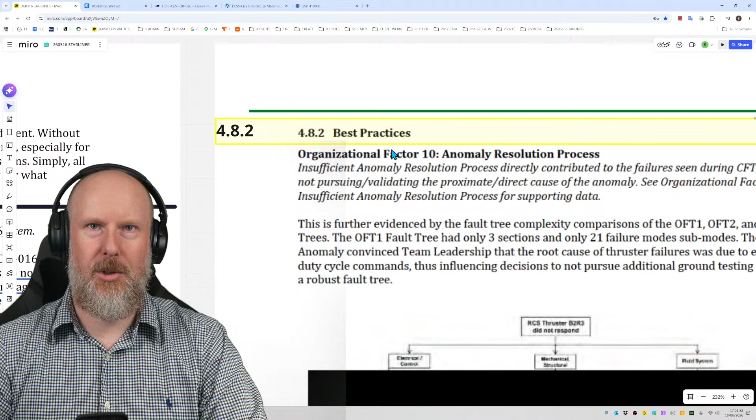Right, so best practices then. Organizational factor number 10. Actually, let me just put some bars in there so it's easy to see what's what. So organizational factor 10, organizational factor 11, observation 1, 2, 3.

Maybe we'll get to certification today. We should do—I mean, there's so much to go through. It's a huge report, 311 pages, and we're at almost page 100, I think. So we've done well to get this far.

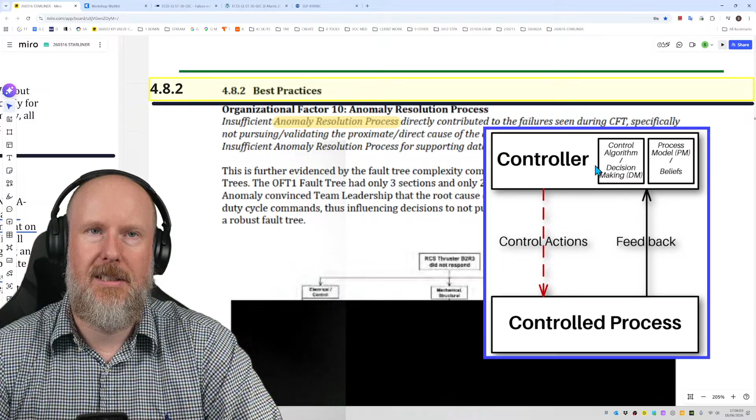And then, if this control process is the people or organization that needs to follow this process, then who or what is responsible for making sure that process is put into that context, and for making sure the controllers in this control process that need to follow this anomaly resolution process have their control algorithm and process model updated, correct, and maintained that way throughout the life cycle? So again, I'm just trying to drill into your brain this control loop. So—an insufficient anomaly resolution process.

Hang on a second. What is going on with this? There we go.

Insufficient anomaly resolution process directly contributed to the failures seen during the crewed flight test, specifically not pursuing validating the proximate direct cause of the anomaly.

So is that the process's fault, or is it the organization, the control structure that is charged with actually fulfilling that process? Because that's two different questions. If the process is nonsense, then we can't be surprised if the execution of that process is going to have issues.

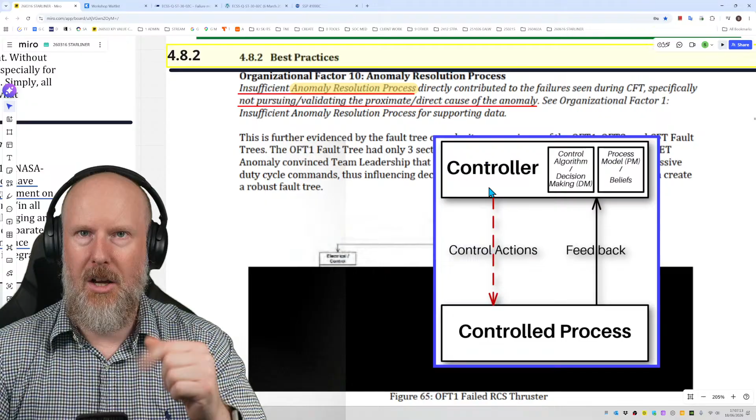So is it the process itself that's incorrect? Is it the creation of that process that's incorrect? Or is it the way that process is implemented in an organization? There's a number of different questions there, and we have to be specific which one of those we're actually referring to. Or is it all of them? Because it could very well be all of them.

See organizational factor 1, insufficient anomaly resolution process for supporting data. And there's something I've forgotten to open up. Just bear with me a second. Because I need the investigation report available, don't I, in case I need to refer to it. So let me just get that open.

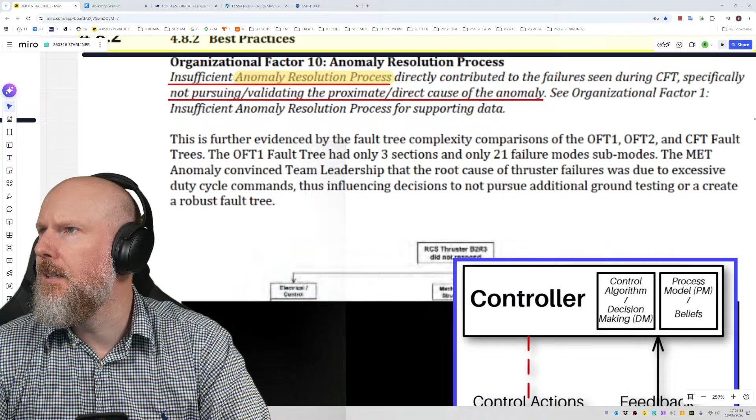There we go. Right, so what page is factor 1? Contributing factor 1, organizational factor, with a Z. Organizational factor 1. Not 15. Oh, apparently there's only 13. Oh, maybe it's 0, 1. No, it's not. Okay, factor. Oh, where is it? Why isn't it? Doesn't the word search function work anymore? Come on, what's wrong with you? Okay, well, that's a bit annoying.

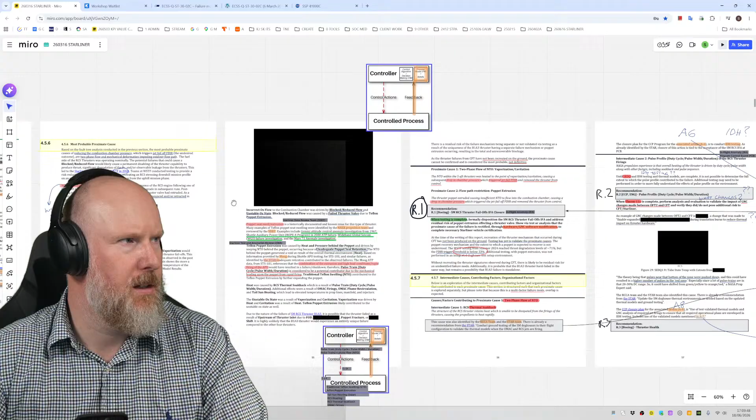So organizational factor 1, where is organizational factor 1 then? Observation 1, recommendation 1, organizational factor 7. Recommendation. Where's the organizational factor number 4? So it's before there. It's not under there. Organizational factor 1. Where is it? Is it really that far back? Evidently so. If only the word search function worked. I'm trying to find the organizational factor number 1. For some reason the word search does not work. Ah, there it is. There it is. Found it, look at that.

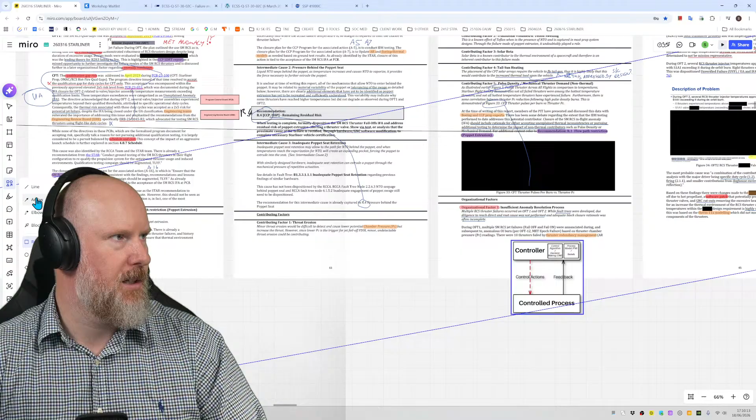Organizational factor 1, insufficient anomaly resolution process. Right, so let's just take that and then we can move it to wherever it is over here. Where is it? Over here somewhere. There we go, that one there. So: insufficient anomaly resolution process directly contributed to the failures seen during CFT.

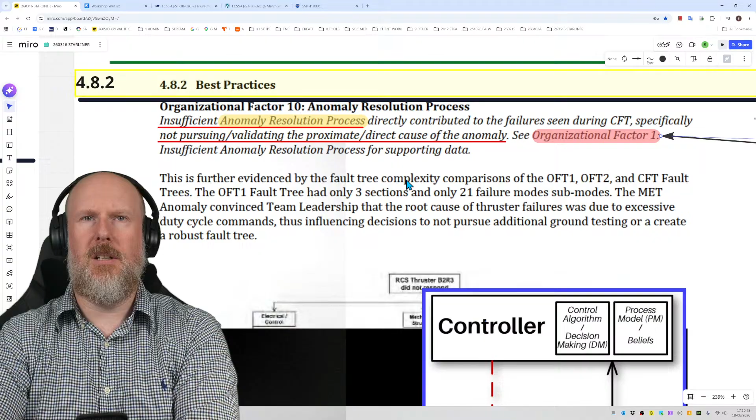Specifically not pursuing validating the proximate direct cause of the anomaly. This is further evidenced by the fault tree complexity. So fault tree analysis, comparisons of OFT1, OFT2, and CFT — crewed flight test, orbital flight test fault trees. So there's 3 sets of fault trees mentioned there. The OFT1 fault tree had only 3 sections and only 21 failure modes, submodes.

The mission elapsed time anomaly convinced team leadership that the root cause of the thruster failures was due to excessive duty cycle commands, and thus influencing decisions to not pursue the additional ground testing or create a robust fault tree.

So if we were talking about the mental model and the beliefs of the team leadership, whoever they are, because it's not really clear what team, what leadership. Are we talking about safety engineering leadership or flight test operations leadership, or who are we talking about when we say leadership? This is one of the benefits of using CAST as part of an investigation, because when you build the control structure model, it forces you to make explicit who you're talking about. So just saying team leadership — well, who are we talking about? Which bit of this control structure is team leadership?

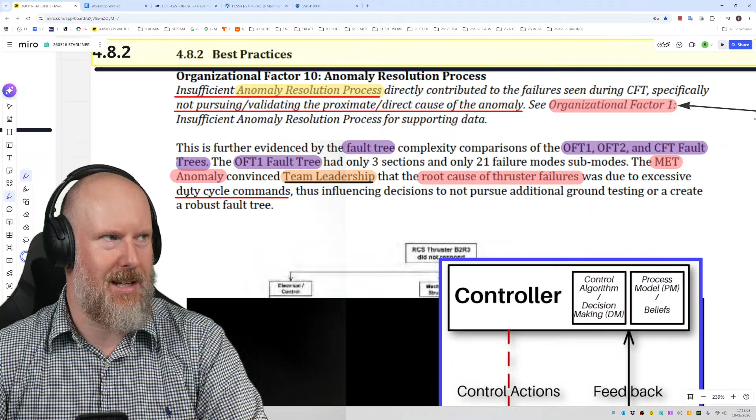If it is a load of different leadership entities doing various things, you can refer to them with a generic term, but you should still at least attempt to be more prescriptive. The mission elapsed time anomaly convinced team leadership that the root cause of the thruster failures was due to excessive duty cycle commands — so that's control actions — thus influencing decisions to not pursue additional ground testing or create a robust fault tree. Well,

I'm not quite sure I understand or agree with how that has been concluded, because surely if they were having issues with the spacecraft, they should have done ground testing and the fault trees anyway. The thing should never have taken off without a robust fault tree. And you could say, well, hang on a minute Simon, you've just been banging on for days and days and hours about how fault trees are a load of nonsense. And my view is that they're not complete nonsense.

They can be helpful for certain specific tasks. But if we rely solely on the fault trees and how good they are, we're, of course, going to miss stuff. And we clearly have missed stuff in this situation. So fault tree on its own is not enough. And it's certainly not enough when they're not done to a good standard.

But again, the reason they're not done to a good standard is something the investigation should go and look at. Why would it make sense for them not to be a good standard, to not cover all of those things? What is the control structure around the creation of those fault trees and the review of those fault trees and the acceptance of those fault trees and making sure that they're changed and updated or reviewed after an incident or near miss? Anyway, let's keep going. I've moaned enough about that.

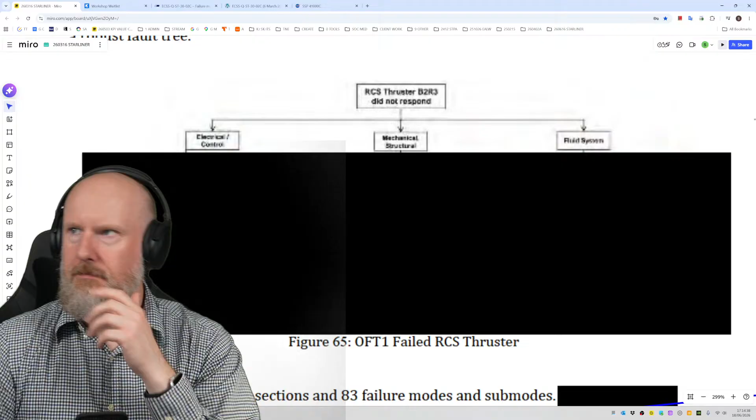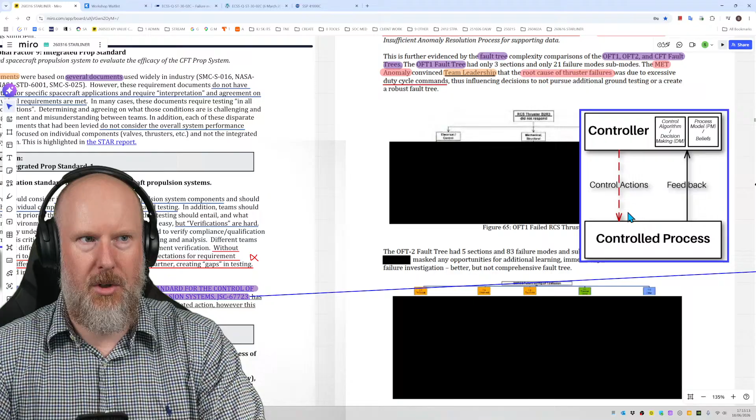So the RCS thruster B2R3 did not respond. So this top event in this fault tree is very specific about one particular thruster. Electrical control, mechanical structure, or fluid system. So very simplistically, electrical control is where you'd anticipate the control actions to be considered. Mechanical structure and fluid system would be considered as inputs and outputs or contributors to the control path or feedback path, or even the controller's ability to control itself.

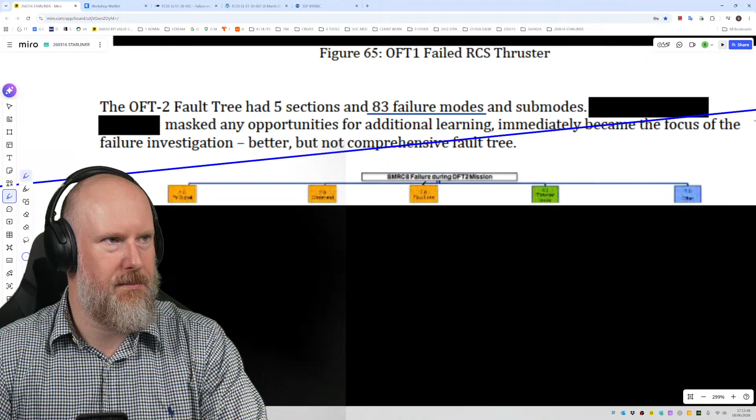So OFT1 failed RCS thruster. OFT2 fault tree had 5 sections and 83 failure modes and submodes, masked any opportunities for additional learning, immediately became the focus of the failure investigation. Better but not comprehensive fault tree. So again, I can't really read what those say. That seems to read other, command, I think. Mechanical, I think. This bit, I don't know. I can't really read that.

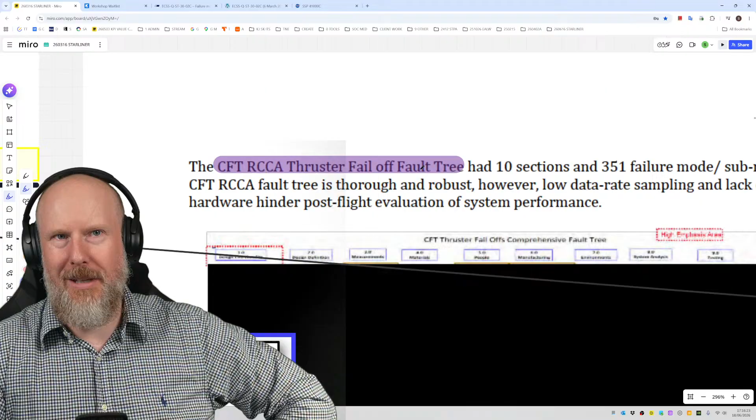The CFT RCCA thruster fail off fault tree. So again, I'm highlighting this with purple because in my convention of highlighting things with lots of colours, purple represents a document of some description. So this fault tree analysis will be in some kind of report, I'd like to think, that's been reviewed and signed off and is config controlled. And maybe it's got a fault tree software file that goes with it. Maybe some spreadsheets. Okay, so the fault tree had 10 sections, 351 failure modes. My gosh, that sounds like a painful fault tree to create and review.

The CFT RCCA fault tree is thorough and robust. You can have the most thorough and robust fault tree in the world. It's still not going to capture stuff that STPA captures. That's a fact. However, low data rate sampling and lack of recovered hardware hinder post-flight evaluation of system performance. Okay, so we've got materials, I think, mechanical, maybe. Manufacturing. High emphasis areas. Testing, something else. Okay.

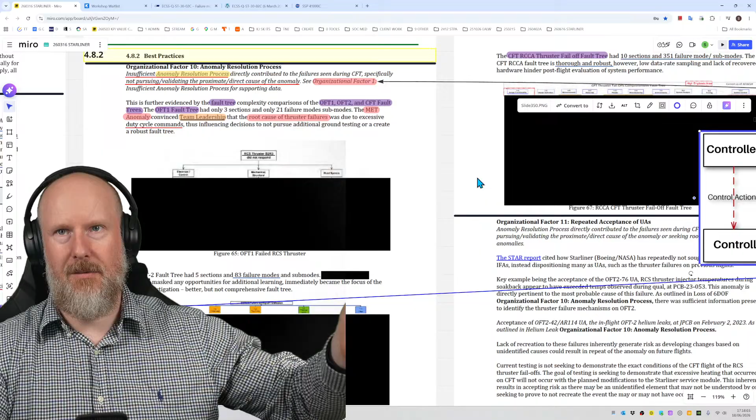Great. So this section is all about the anomaly resolution process, but all they've done is talked about the quality of the fault trees. So what is it about the process? What is the process? Is there a reference number for it? Is it that they were using an old process, or an obsolete process they shouldn't have been using? Why is it not discussed in this section? I want to know, or the audience wants to know. Is this discussed elsewhere? I don't know. But this bit is not adequate. There's not enough there.

And I'm hoping, just thinking about things through the lens of the feedback loop, you're starting to think, well, yeah, Simon, I kind of see what you're talking about. These things need to be addressed. In fact, shall I just make it really explicit while I'm at it?

Let me just... No, I didn't want to do that. All I wanted was... Oh dear, what have you done, Simon? You made a mess. All I wanted was the grey text. Oh, I'll just use that. There we go, that's quicker. Right, sorry, let me just do this again.

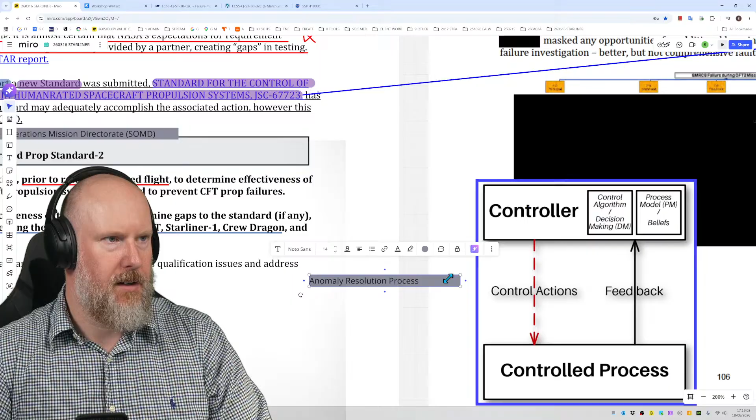So if you imagine that anomaly resolution process, for the purposes of the investigation, this is the anomaly resolution process at the top, and it is implied that a control action from that process goes to the controlled process, which is the project, the program in this context. Project or program.

And I've spelled program wrong. There we go. Got an extra R in there.

There we go. Right. So if you think about it simplistically like that, we've got this piece of paper with some stuff inside it. And that stuff is intended to influence the program or the project and the people that do the work. So we can start thinking about it like this. Well, how does that anomaly resolution process find its way to the people in the program? What decisions does it contain? Does it contain criteria? Does it contain requirements for information? Does it have references that inform its process?

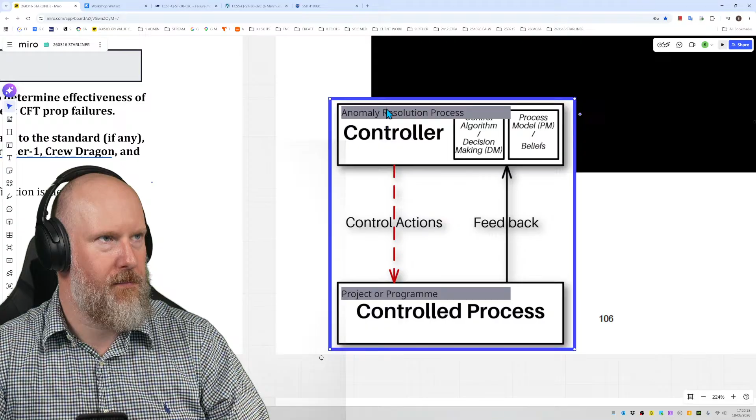And then we can think about, well, oh dear, what have I just done? And then we can think about it from the perspective of, well, what if this is the process here at the bottom? Who is the organizational sponsor, responsible stakeholder? So they're responsible for the process. So what is it they do about making sure this process is up to scratch and actually works? What feedback do they get about the process or from elsewhere to make sure that this process is working?

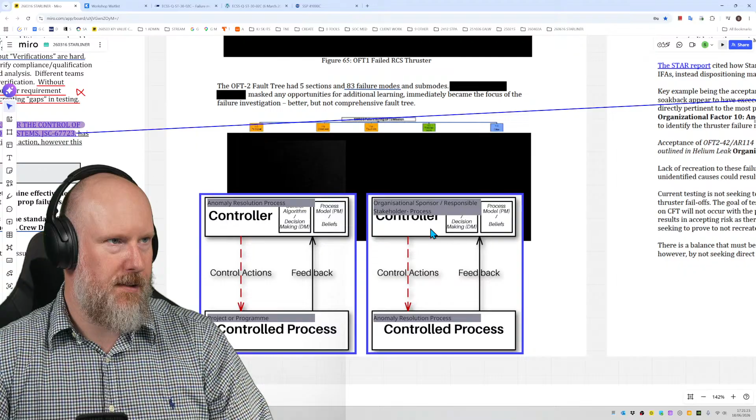And then the next part is, I think I've talked about that to death. So I suppose you could say that this controller is like that. So the organizational sponsor, responsible stakeholder for the process itself, and then the process and how it affects the program. And then ultimately you have the actual content, control actions originating from fulfillment of the process. So whoever does the actual investigation and the work. So you can see there's a bit of a mini control structure there for the context of the process. I hope that makes sense.

So let's just move that up a little bit. Group. No. Yeah. There we go. Bring that to the front. There we are. Right. Let's leave that there like that, shall we? Let's steal that one. Okay.

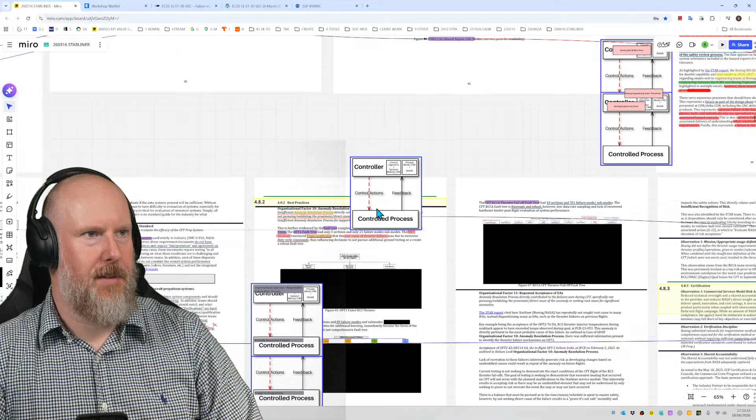So let's go on to organizational factor number 11. So repeated acceptance of unexplained anomalies. That's what it is, isn't it? UA. Unexplained anomaly. Yes, that's what that means. So unexplained anomaly. So let's have a think about this then.

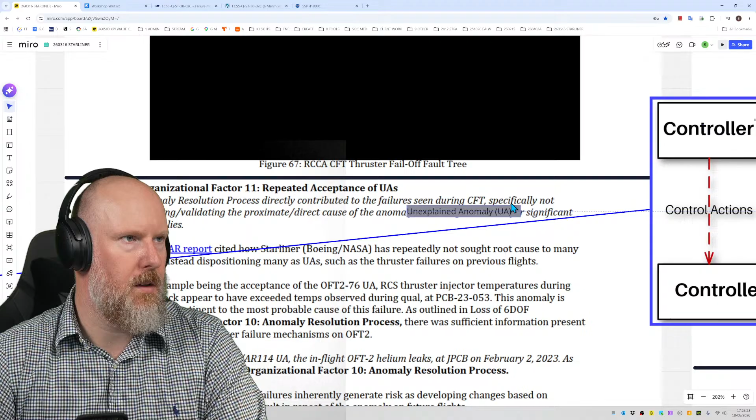So this is the program itself and this is the leadership of the program. If they're getting feedback which are essentially unexplained anomalies, that should be a bit of a warning flag as to something's not right here. Either we're not doing a process properly or detailed enough, or there's something genuinely going weird. So what beliefs did that leadership have? What decisions were they making? And what control actions did they provide based on these repeated acceptance of unexplained anomalies? Why would it make sense to keep accepting those things?

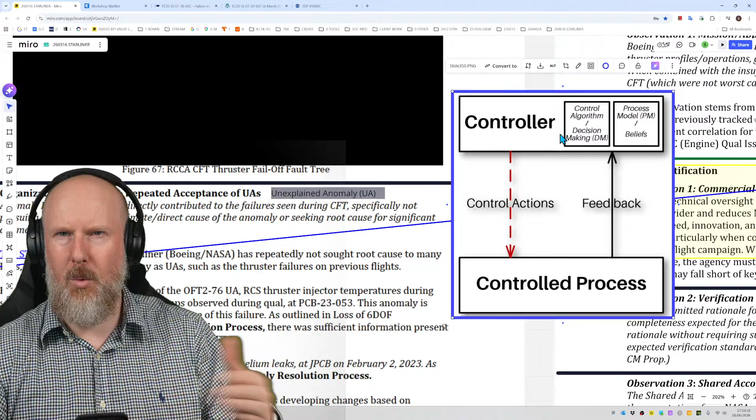You know, who or what is involved in this as an independent assurance loop that should be saying, well, hang on a minute, leadership, you're accepting these unexplained anomalies. Why aren't you doing anything about it? Where's that independent assurance loop? How are they implicated in this?

So the anomaly resolution process directly contributed to the failures. I'm not sure I agree saying that it directly contributed. Maybe there's a rhetorical discussion there about, well, when we say directly contributed, what do we actually mean? Because like I said before, when you're talking about direct contributions, you're really talking about the physical process where harm occurs, and then those controllers that are directly in physical contact with that process. Whereas an administrative process is really quite far removed from that front line. So how can you really say that it's directly contributing? Maybe that's rhetorical, but anyway, let's keep moving.

So the STAR report cited how Starliner, Boeing and NASA has repeatedly not sought root cause to many IFAs. I think that's in-flight anomaly, isn't it? IFA. In-flight anomaly, everybody. See, I'm getting really good at remembering. I'll forget in a minute. So Boeing Starliner has repeatedly not sought root cause to many in-flight anomalies, instead dispositioning many as unexplained anomalies, such as the thruster failures on previous flights.

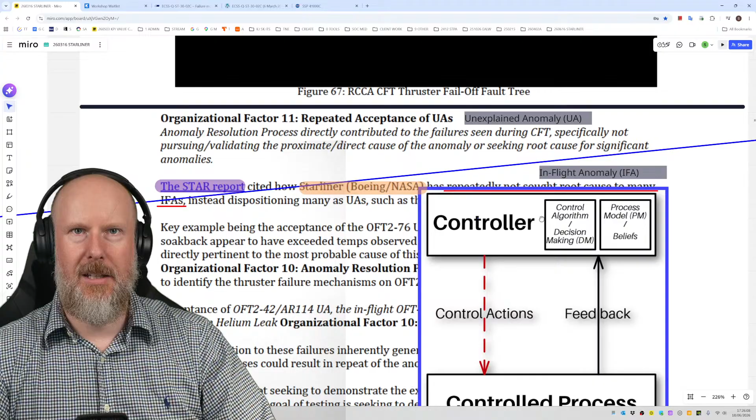Right, so let's just explore that for a minute. So if this controller is Starliner, Boeing, NASA as an organization, and they repeatedly not sought root cause to many IFAs, and they've instead dispositioned many as UAs, down here, control actions, why would it make sense for them to do that? Is it because there's loads and loads of them and they're overwhelmed and there's not enough people or resources to deal with it?

Or maybe there's not enough time because the timescales are ridiculous. Or is it that their investigation method is not particularly helpful for these kinds of failure, non-failure, interaction type accidents? I'm kind of thinking it's a mixture of both of those. And the recommendation, of course, is going to be, the people that are doing these investigations, these root cause analyses, they need somebody or some people equipped to use CAST to be able to help them do that quickly and get better, more specific results.

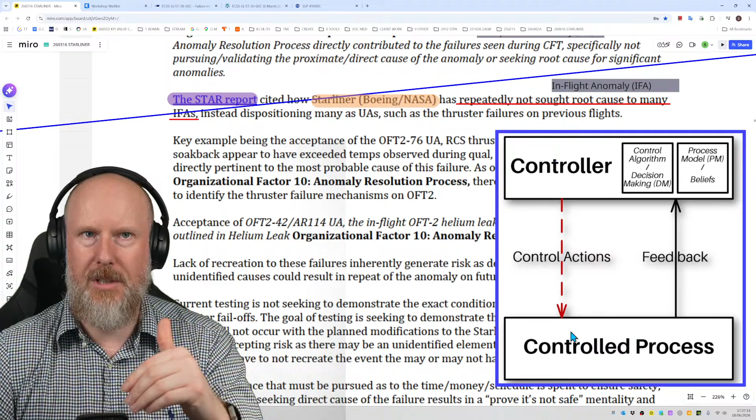But of course, that's only going to work if the leadership are willing to take on board that there are issues that need to be resolved. Because you can have the best safety analysis method, the best investigation method in the world, but if leadership are not going to pay attention or give you the resources needed to resolve the issues, then you're just shouting into the wind, and at some point you're going to get demoralized and leave the organization. I mean, it'd be interesting to know what the staff turnover is, safety engineer and investigator turnover is in this situation. What the sickness rate is and stress and all that kind of business.

Okay, key example being the acceptance of OFT2-76 UA: RCS thruster injector temperatures during soakback appear to have exceeded temperatures observed during qualification. This anomaly is directly pertinent to the most probable cause of this failure. As outlined in Loss of 6 Degrees of Freedom Organizational Factor 10 anomaly resolution process, there was sufficient information to identify the thruster failure mechanisms on OFT2. Okay, so there's a question here over the quality of the investigation and the method that they've used to do the investigation.

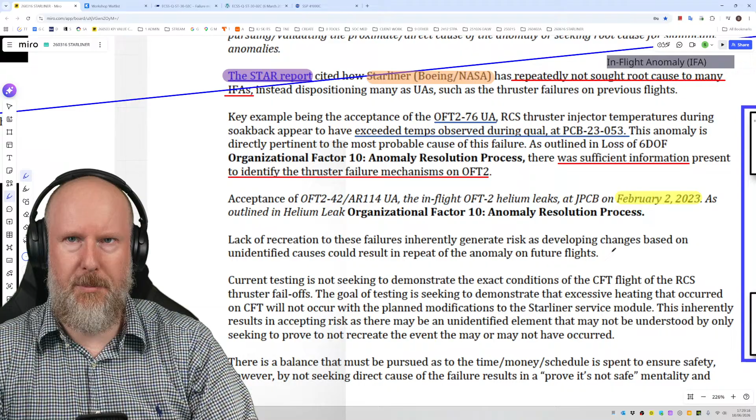Acceptance of OFT2-42/AR114 unexplained anomaly. The in-flight OFT-2 helium leaks at JPCB on February 2nd, 2023. Pardon me. As outlined in the helium leak organizational factor 10 anomaly resolution process. Lack of recreation to these failures inherently generates risk, as developing changes based on unidentified causes could result in the repeat of the anomaly on future flights.

Yeah, I mean, there's also developing changes, making any kind of change anyway, especially when you don't understand what you're trying to fix. That could generate and introduce new problems, new second-order effects that might even be worse than what you were trying to avoid in the first place. So you've got to be really, really careful, really balanced.

Okay, current testing is not seeking to demonstrate the exact conditions of the crewed flight test flight of the RCS thruster fail-offs. The goal of testing is seeking to demonstrate that excessive heating that occurred on CFT will not occur with the planned modifications to the Starliner service module. This inherently results in accepting risk as there may be unidentified elements that may not be understood by only seeking to prove not to recreate the event that may or may not have occurred.

Yeah, I mean, that's a good point. There is a balance that must be pursued as to the time, money, schedule spent to ensure safety. However, not seeking the direct cause of the failure results in a prove-it's-not-safe mentality. Oh my gosh. This is one of the banes of my existence. The number of arguments I've had with project managers and senior leaders about stuff like this and risk decisions is, oh, well, what's the probability of this happening? It's so unlikely that we don't need to worry about it. You need to prove to us that it's not safe before we'll take whatever you say seriously.

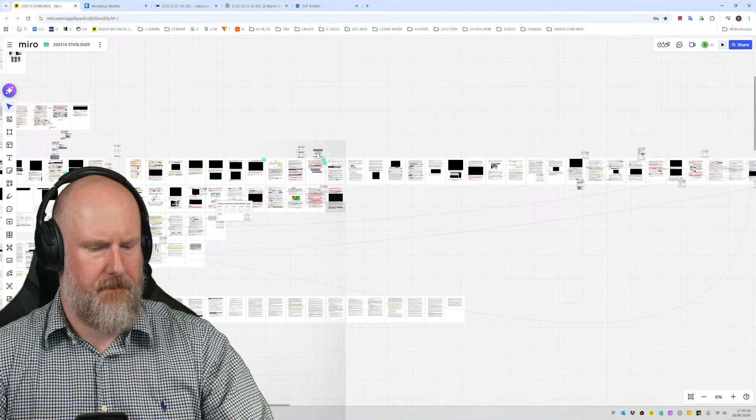Oops-a-daisy. What have we just done? Gosh, it's hot in here today.

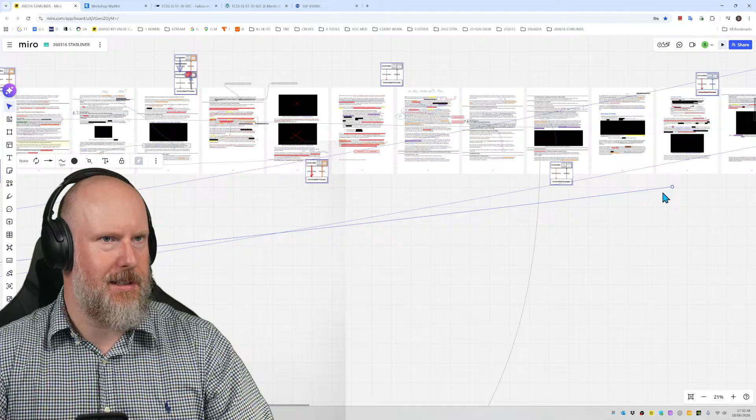Right, organizational factor 6, insufficient recognition of risk. So that one, isn't it? Yeah. So organizational factor 6, I think, is in the next section below, isn't it? Yeah, I think it is. Let's just zoom to that bit, shall we? There we go. Right, let's have a look. Organizational factor number 6, where are you hiding? Come on, where are you? You're in there somewhere, I know you are.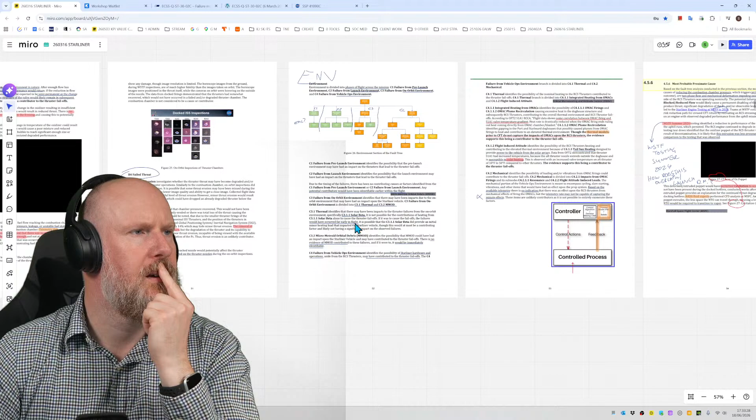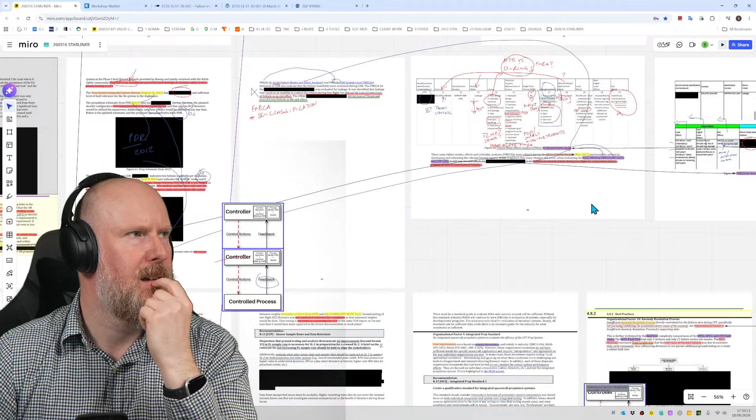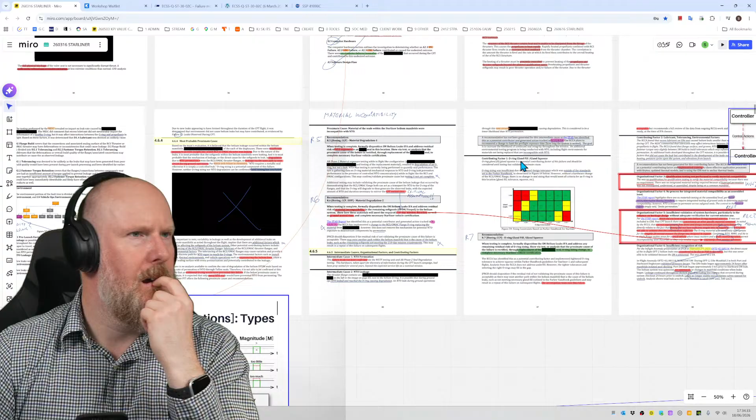Oh, there's number 8. So number 6 should be quite close. Number 2, 3. Oh, there's number 7. So where's number 6? Organizational factor number 6. Ah, come on, where is it? There it is, there it is. I've found it. Found it, there we go. Organizational factor number 6. Insufficient recognition of the risk.

So that is the beliefs, the process model of whoever they're talking about, leadership or whatnot. Okay, so let's go back down here.

This was also identified by the STAR team. There is already a recommendation from the STAR: use as-is dispositions should only be considered after exhausting options for hardware changes. Again, it could be software contributors as well. Increase the rigor in evaluating UAs by investing in more hardware testing, recreation of failure modes to validate fault tree closure rationale.

So yeah, I agree to some extent, but my major point is you should use STPA and CAST, or use CAST and inform STPA. You could do a review of the fault tree using STPA and immediately find gaps in it. That might go some way to help understand the anomalies a bit better.

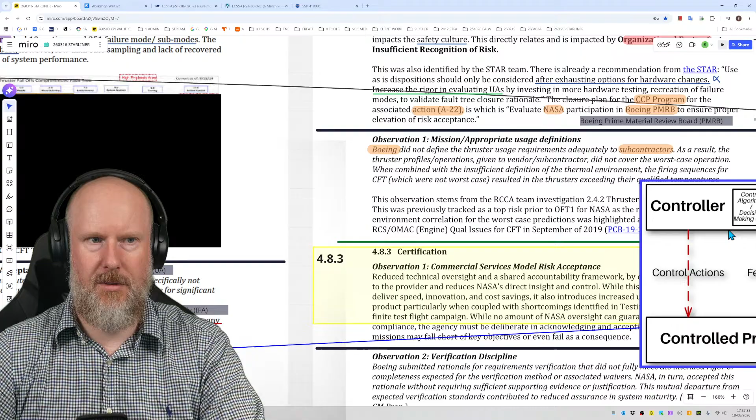So why would it make sense to do that? What's going on? As a result, the thruster profile operations given to the vendor subcontractor did not cover the worst case operation. Oh dearie me. When combined with the insufficient definition of the thermal environment, the firing sequences for CFT, which were not worst case, resulted in the thrusters exceeding their qualified temperatures.

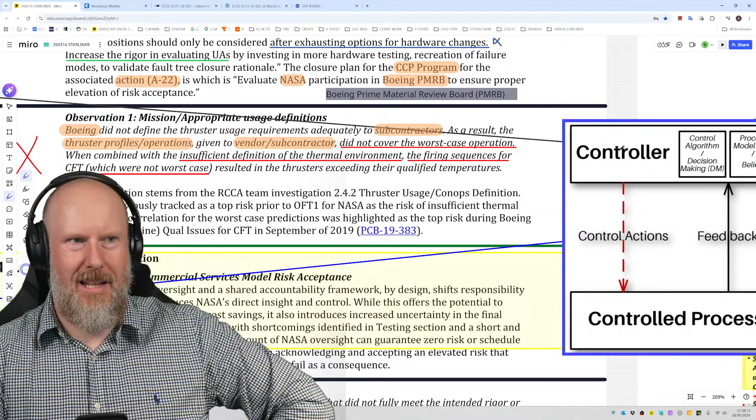Right, so, I mean, that's a huge thing. Why would it make sense for them not to do that? And how can we prevent that in the future? There needs to be somebody across this interface that's basically refereeing and making sure they provide adequate requirements. And if they're not, then making sure that that is escalated and addressed. Okay, this observation stems from the RCCA team investigation.

2.4.2, thruster usage ConOps definition. Ooh, ConOps, everybody. Reviewing a ConOps with STAMP STPA is a fantastic way to find holes in the design or the concept itself. This was previously tracked as a top...

Oh dear. This was previously tracked as a top risk prior to OFT1 for NASA, as the risk of insufficient thermal environment correlation for the worst case predictions was highlighted as the top risk during Boeing RCS OMAC engine qual issues for CFT in 2019.

So they knew about it. This wasn't a failure, they knew about it. So how did this get through?

And this is the thing that's a little bit frustrating about this report and others similar to it - they say these things like that, and then they just leave you hanging. They say this is the what, but then they don't say, well, so what and why? Because we need to, you know, this is all great, but so what? And then what have you done about it? Why is it important? What are the actions? What are the recommendations? There seems to be a lot of loose ends, open ends in this.

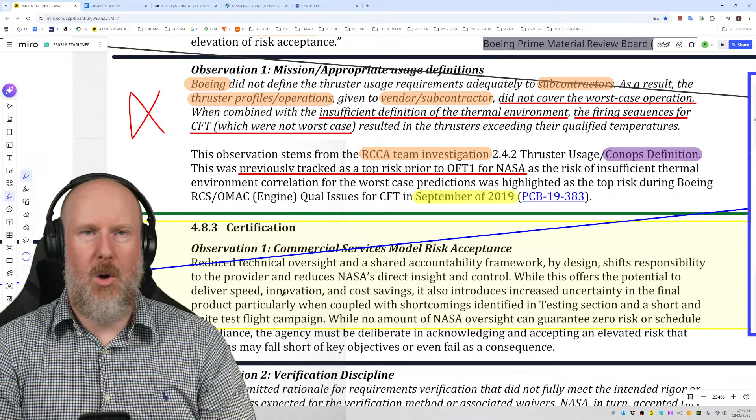And I'm not criticising the investigator, because I understand how difficult it is to do something like this and write it up in a technical report. But there should be - if you think about the control loop for the output, which is this report - somebody should be reviewing this to make sure the report covers all of those things and make sure there's no loose ends or unexplained dead ends in the report. Because it's wasted effort if you don't then follow up on it. Then it undermines the credibility of the report and the investigators.

Oh dear, right, it's very hot today. I'm very, very hot. Right, here we go.

So observation 1, certification. Commercial services model risk acceptance, reduced technical oversight, and shared accountability framework by design shifts responsibility to the provider and reduces NASA's direct insight and control.

Straight away then, it sounds like the control structure that existed prior to the commercial crew program was different to how it is for commercial. And those changes in responsibilities, structure and proximity have probably most definitely contributed to this accident, this issue.

While this offers the potential to deliver speed, innovation and cost savings, really? Is that right? I don't think I've ever seen examples where that's happened, but anyway, especially on complex systems like this. It also introduces increased uncertainty in the final product, particularly when coupled with shortcomings identified in testing and a shortened finite test flight campaign.

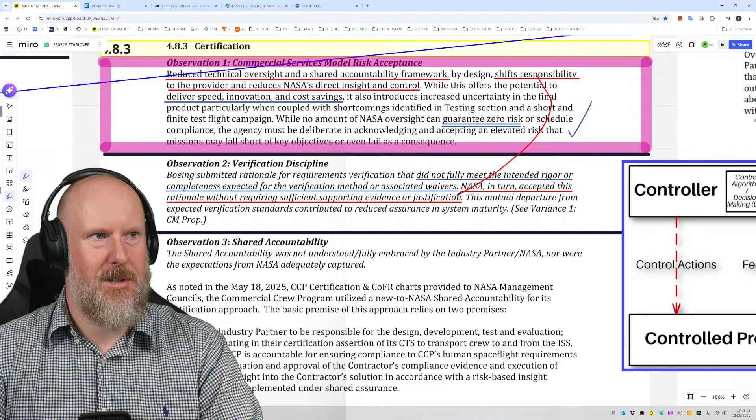NASA in turn accepted this rationale without requiring sufficient supporting evidence or justification. Again, why would it make sense to do that? If we're talking about responsibility shifts, for Boeing and NASA, then we shouldn't be surprised when that happens.

This mutual departure from expected verification standards contributed to reduced assurance in system maturity. Yeah, fantastic. Okay, so what are we going to do about that, everybody?

Observation 3, shared accountability. The shared accountability was not understood, fully embraced by the industry partner, NASA, nor were the expectations from NASA adequately captured.

So, what does shared accountability actually mean? Because if one person is not accountable, or one organisation is not accountable, and it's many, then no one is accountable. A single focal point needs to be held accountable. And then the way that they implement things, responsibilities and accountabilities and actual capabilities and resource to do these things, that has to be considered.

So I think having shared accountability is not a good idea as a starting point, because you're diluting responsibilities. No one is in control. Somebody has to be in the driving seat. It can't be everybody or nobody.

Anyway, and the expectations from NASA were not adequately captured. So if this is NASA, this controller, and this is the program, and their expectations were not adequately captured or communicated, then whose responsibility is that?

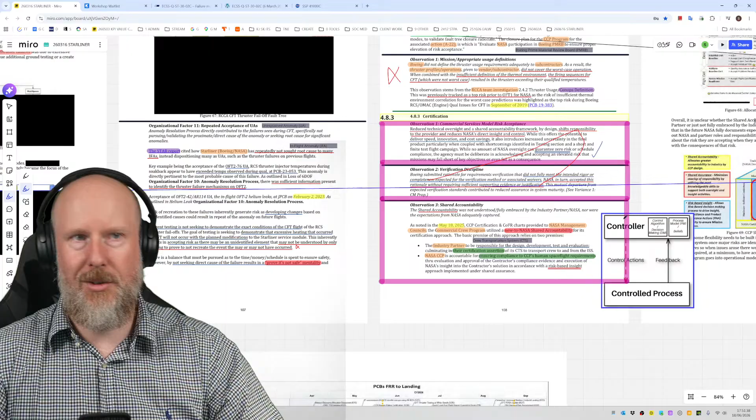So again, this is a big topic that needs to be investigated further, because unless this gets fixed, they're just going to have repeats of this nonsense over and over again until people get killed and they run out of money. That's how it works. We can do fault trees to death, but if this nonsense is not sorted out, well, it's just a matter of time before something happens.

And again, as a taxpayer, not in the US, but if I was a US taxpayer and they were wasting billions on this kind of stuff without it being done properly, then I wouldn't be a very happy taxpayer.

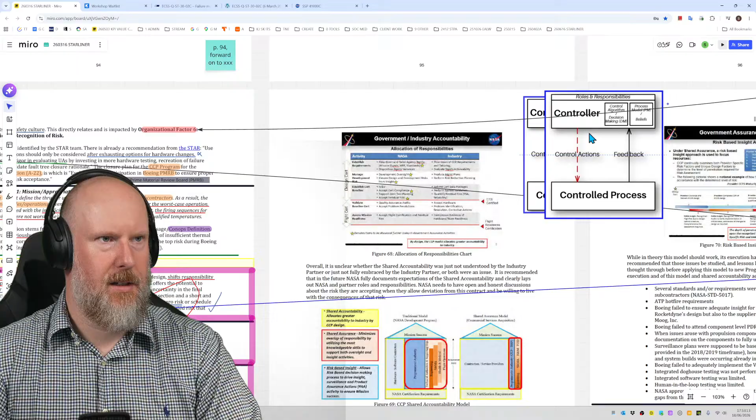There we go, right. So it's like that one, but it's got roles and responsibilities written on it. Slightly different size, but anyway, right.

So let's just think about this for a minute. Each controller in the control structure has, either logically, implicitly, or explicitly, some roles and responsibilities. And by definition, they should have the capability, the resources, the control actions and feedback to be able to fulfill those responsibilities.

Otherwise, they're accountable but aren't able to fulfill what they're supposed to be accountable for. And so this is saying here, government industry accountability - so NASA, the government, and then industry. So it says to establish requirements, NASA should flow down and tailor agency requirements, mission requirements, HRR - don't know what that is, human reliability requirements maybe - standards, and then disposition requirements variances. And this star denotes items to be discussed further today in government assurance activities.

By design, the CCP model allocates greater accountability to industry. So they've moved accountability from the government to the industry, which should be fine, so long as the control structure actually represents and reflects that. So the industry, flow down of CCP requirements and tailoring, evaluate requirements achievability. So these, in the context of established requirements, these are roles and responsibilities for those controllers.

Manage development risk, development oversight, elevate design and development risks from insight, produce management plans, perform risk reduction planning. So plans and plans - that doesn't sound like managing development risk to me, everybody. This bit is not managing development risk.

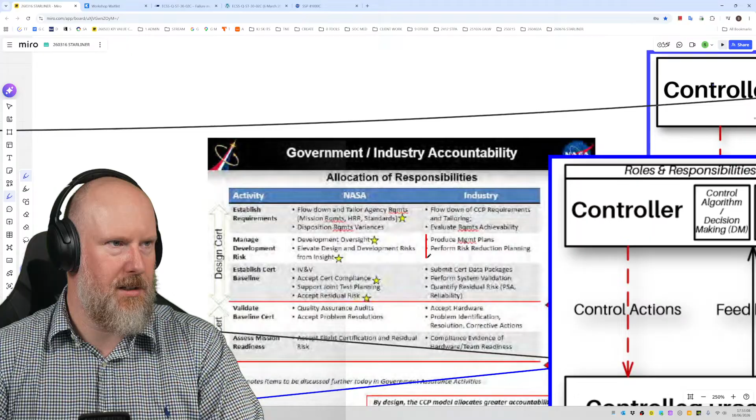Because it said over here that the industry partner is responsible for the design, development, test, and evaluation. So by definition, they should. They're the only controller in the structure, directly in control, that can influence and be responsible for risk management in the design, development, test, and evaluation. NASA is remote from that. So they can't be held responsible because they're too far apart. It must be the industry partner.

But if the industry partner has been told by this slide here, oh well, you just need to produce management plans, you need to perform risk reduction planning, well of course the program managers and project managers are going to read that and think, well, it's organizational risk management, enterprise risk management, isn't it? It's not safety risk management. Because it says there, elevate design and development risks - so that must be NASA's responsibility, surely. So they're passing the baby between them and not even realizing it.

Establish certification baseline, independent verification validation, accept certification compliance, support joint test planning, accept residual risk. So they're accepting residual risk, when over here, the industry is said they're responsible for design, development and test and everything else. So this responsibility should really be over here - that's what that previous line said. I mean, yes, NASA should be involved in that decision, but they're not the ones that are accepting it.

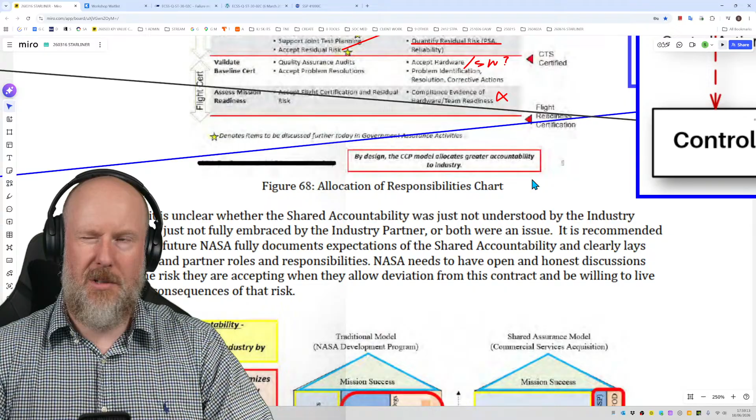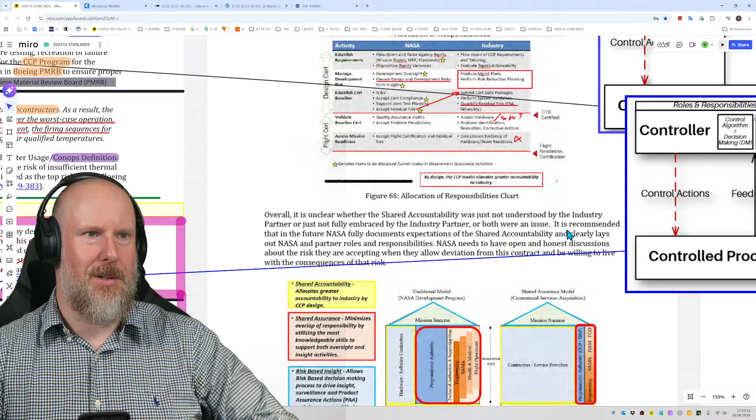And that's an allocation of responsibilities chart. So yeah, if there's a RACI chart—responsible, accountable, consulted, informed—and you were to look at it through this lens, you could quite quickly identify weaknesses, as I've done on a few different projects in the past, with those responsibility charts. And ultimately, if that stuff at the top is not nailed down, we shouldn't be surprised when we're having stuff like this happen. It's self-evident, you know.

Anyway, overall, it is unclear whether shared accountability was just not understood by industry partner, or just not fully embraced, or both. It is recommended that in future, NASA fully documents expectations of the shared accountability and clearly lays out NASA and partner roles and responsibilities. Yes, I agree with that. That's important. Totally get that.

But the fundamental concept of shared accountability, as it's presented, is not adequate to maintain and manage safety. That's my humble opinion. And if you're involved in this stuff and you need help and support to sort this out, get in touch.

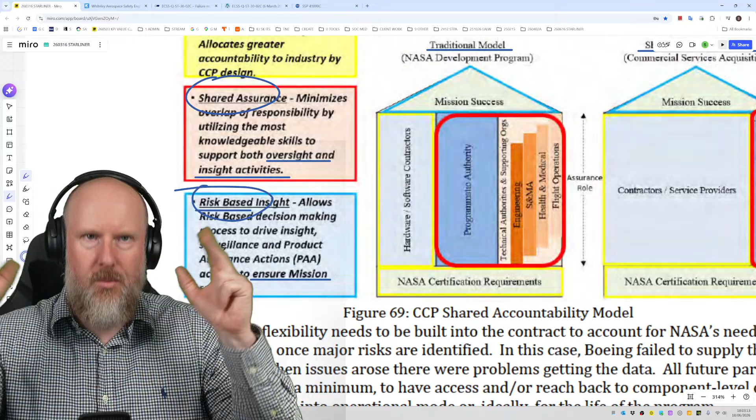It sounds great, but in practice, it's a load of nonsense, in my opinion. It allows a risk-based decision-making process to drive insight, surveillance, and product assurance actions and activity to ensure mission success. No, it doesn't. Risk-based insight does not ensure mission success. It ensures that you're going to miss stuff and you're not going to know about it until something really serious happens. And again, the balance between program risk, commercial risk, and safety risk—they're two different things. Yes, they're all risks, but they are managed in different ways, and that should be recognized and respected.

So let's have a look. Mission success, NASA cert requirements. So hardware, software, contractors, program authority, technical authorities and supporting organizations, engineering, S&MA.

Don't know what that is. What's S&MA? Is it safety and mission assurance, presumably? Yeah, I think it probably is. So let's just... safety and mission assurance, S&MA, question mark.

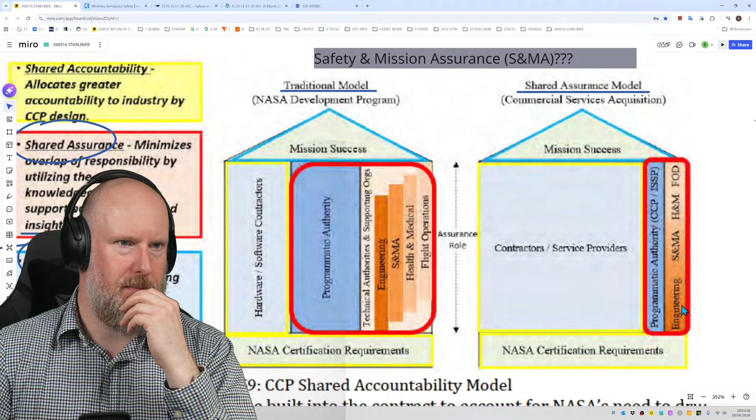Health and medical flight operations, contractors, service providers, program authority, engineering, S&MA, FOD. See, this doesn't make sense to me. Because fundamentally, the control structure should be the same regardless of who these are. The difference is who actually fulfills those different parts of the control structure.

This just seems to shove responsibilities around without actually making it clear which ones are whose and how they're going to be coordinated. Because the contractors themselves should have some level of safety and mission assurance. They should have some level of engineering. So how do those contractor and NASA organizations interact with each other? And who referees that? Who referees and makes sure they're behaving appropriately? I think this model is too simplistic.

I highly recommend using STPA to build a control structure for this and then generate the roles and responsibilities and then allocate them to the organizations. Make sure that control structure influences how those organizations interact with each other and that it's documented, as it says up here. Where is it? NASA needs to document it, needs to have open and honest discussions about the risk. Where is it? Yeah, there we go. NASA fully documents.

But again, this takes time. It's a lot of work. It's a project in its own right doing that before you even start doing the actual project.

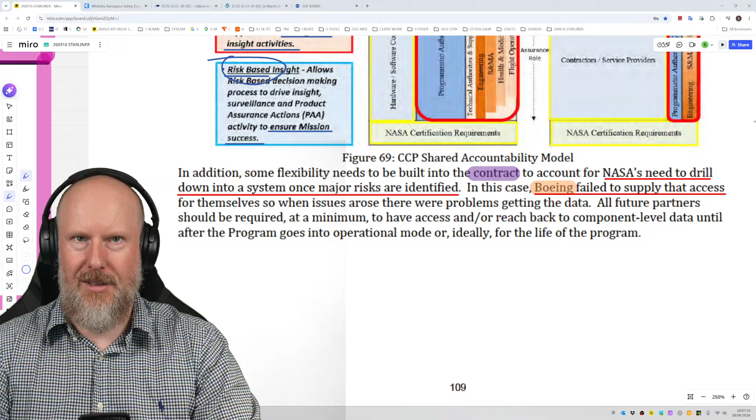And Boeing should be taking the lead on it, because, I'm pressing on the wrong screen, it literally says the industry partner is to be responsible for the design, development, test, and evaluation. So they should be doing it all. And then getting NASA involved and building relationships with them.

So if that's not what the industry partner's doing, and I think that's what this says here, shared accountability was just not understood or not fully embraced by the industry partner, then yeah, okay. But if they're not doing that, then who is holding them accountable to make sure that they do that? Who's the referee in this situation?

Yeah, all future partners should be required at a minimum to have access and or reach back to component level data until after the program goes into operational mode, or ideally for the life of the program. Right, I'm going to get on my high horse now, just for a minute. There should be the ability to go back and look at any of the data down to component level for the life of the program, and also beyond the life of the program.

Especially if this system, this platform and parts of it are going to be reused for future missions. And also if there is an accident or incident investigation in the future, you need to be able to get access to that information and understand what was going on.

I mean, my experience with the Nimrod MR2, the Nimrod review that I was involved in on the periphery as part of a contract, one of the big challenges for that investigation was the access to available information about the modifications performed to the aircraft type throughout its life, because it was, relatively speaking, an old aircraft with lots of modifications over time. And in fact, each tail number was pretty much a custom built aircraft in its own right.

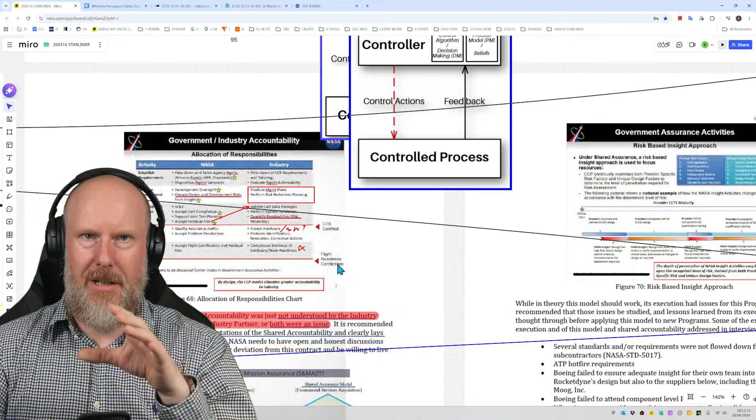Right, so this one, wouldn't it be nice if the investigation said where this responsibilities chart is from? Is this part of the contract, or is it just one of those slide packs that gets thrown on the screen during contract negotiations and never seen again? You know, how do these people in these organisations know what their responsibilities are? How is it communicated to them? What does the control structure look like?

Okay, so this next slide is risk-based insight approach. This just, conceptually, I just think this is nonsense, but that's just me. From a program risk perspective, you know, fill your boots. Not really too fussed about that. But from a safety risk management approach, we shouldn't mix the two, or it should be done very, very carefully by responsible adults. Under shared assurance, a risk-based insight approach is used to focus resources.

CCP continually examines both provider-specific risk factors, what is a risk factor, and unique design features to determine the level of penetration required for risk assessment. Well, when you say risk assessment, what do we mean? Do we mean program risk assessment to make decisions about how deep we go, or are we talking about actual engineering safety risk? The following pictorial shows a notional example of how the NASA insight activities change in accordance with a determined level of risk.

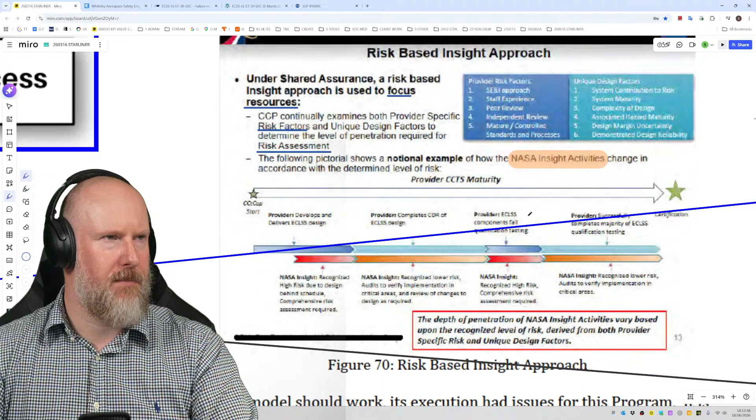So provider, this is a bit difficult to read, I'll just zoom in. So provider risk factors, S, E and I approach. Don't know. Staff experience, peer review, independent review, mature control standards and processes. Again, this is the first time they've done it, so mature and controlled standards and processes, I think that's a bit naive. Unique design factors, system contributions to risk, system maturity, complexity of design, associated hazard maturity, design margin uncertainty, demonstrated design reliability. Reliability, everybody, yeah, it's reliable, but it's dangerous.

Complexity of design, I think that should be expanded to consider complexity of the control structure and how the organisations interact with each other. Because this topic over here, where is it? Boeing failed to supply that access for themselves, so when issues arose, there were problems with getting the data. This organisational, so I'll put org, and contractual complexity. It'd help if I used a pen, wouldn't it? Let's use a pen. Here we go. Contractual and organisational complexity.

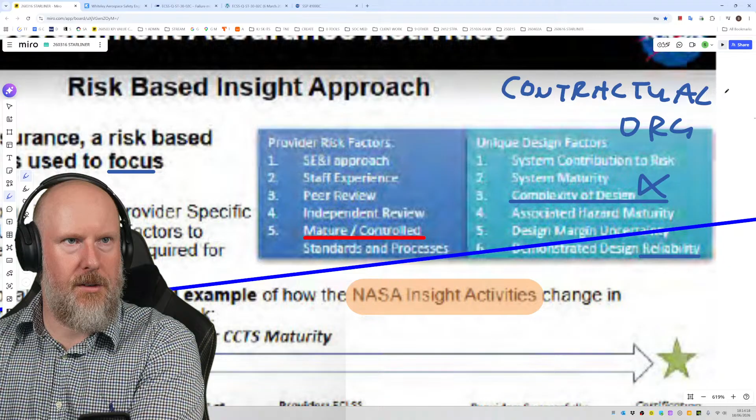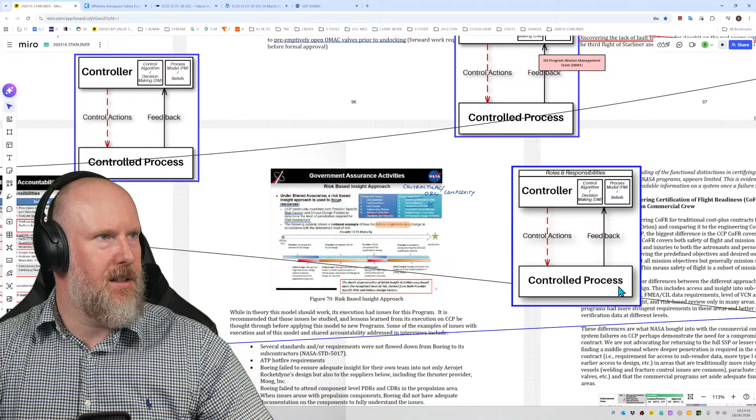I suppose that's not a design factor, is it? Because that's about the actual product of the process. Yeah, I don't think this is good enough. I don't think it's detailed enough. I think it's not looking at the right things. You know, if this was, let's take our little jigsaw puzzle. If this was the risk-based insight approach, which is the control algorithm and beliefs, these are the things that this controller needs to look at, this risk-based oversight insight approach. So this list of stuff is not going to detect and deal with the issues that we've spoken about in this investigation report. It might touch on the periphery of some of them, but it's just not good enough, I don't think.

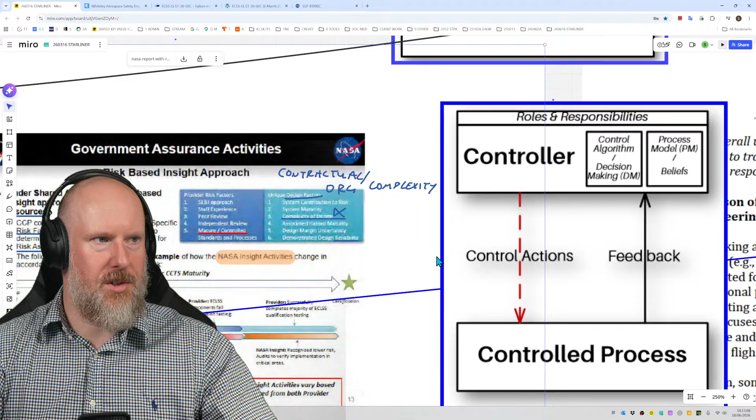Okay, so provider CCTS maturity. Oh, what does CCTS mean, everybody? CCTS. Is it commercial crew transportation system? There it is, look, mate. Oh, look, management plan. Yeah, we'll have a look at that. There we go. Boeing's commercial crew transportation system maturity.

I think it's a bit of a joke, to be honest. I know that sounds bad, but if they didn't get the design for OFT1 right for flight tests, collecting flight test data, and then they didn't do it for OFT2, and then they went flying with people on board for the third flight, that shows such immaturity from a safety management perspective and a program management perspective that, well, yeah, maybe I'm being a bit overly critical, but it's really not good.

And this, as it seems to be described, doesn't seem to cater for and detect any of those kind of issues and address it. So this is not a very good approach. It's not suitable. So one of the observations that should be added to the report is this method, this approach is inadequate and needs to be re-engineered. And we recommend using STAMP, STPA, to do that.

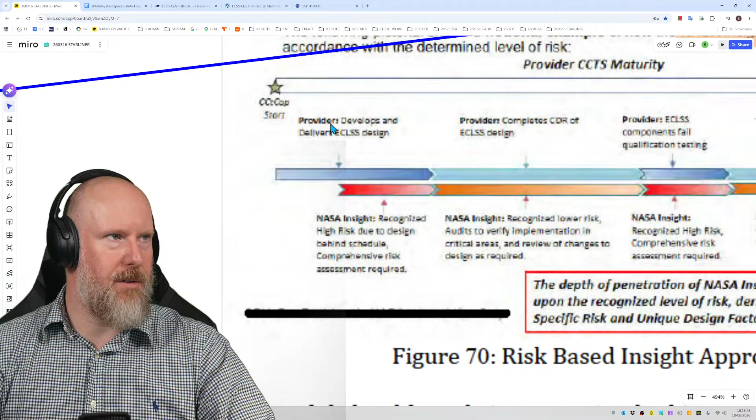Okay, so let's zoom in and have a look. So we've got provider develops and delivers ECLSS design. So what's ECLS? Oh, bloody acronyms. ECLSS. No, don't know what that is. So develop and deliver design, complete CDR of design, provider components fail qualification testing, successfully complete majority of qualification testing.

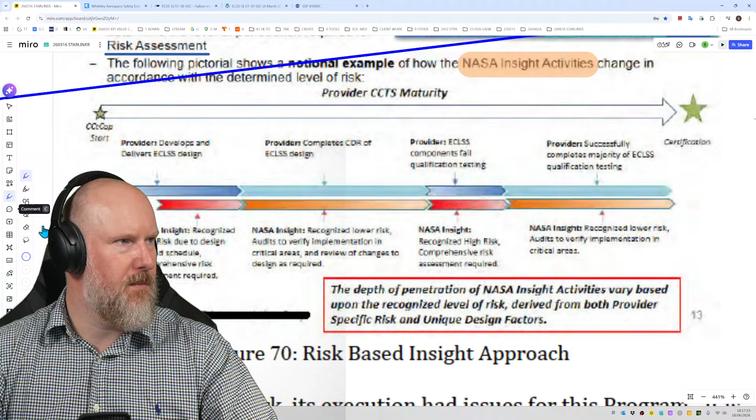NASA insight recognises high risk due to design behind schedule, comprehensive risk assessment required. NASA insight recognises lower risk, audits to verify implementation in critical areas, and review of changes to design as required. NASA insight recognises high risk, comprehensive risk assessment required. NASA insight recognises lower risk, audits to verify implementation in critical areas. The depth of penetration of NASA insight activities vary based upon the recognised level of risk derived from both provider-specific risk and unique design factors.

To be blunt, I don't think that's very good. I don't think that's adequate for dealing with this situation. In fact, I think this could have contributed to this situation. It's a bit of a distraction from actually dealing with safety engineering and program issues. But that's just me. You know, I'm talking about safety risk management, not program risk management.

While in theory this model should work, no, I don't agree. I think this model is nonsense. But that's just me. Its execution had issues for this program. It is recommended that those issues be studied and lessons learned from its execution on CCP be thought through before applying this model to new programs. Yeah, so I'll just say it again. If you need a hand doing that, give me a shout and we can sort that out and make the project not only safer, but less risky.

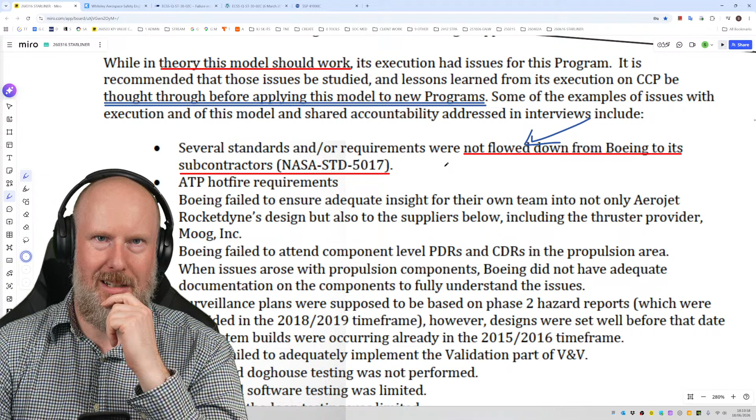ATP hot fire requirements. Boeing failed to ensure adequate insight for their own team into not only Aerojet Rocketdyne's design, but also to the suppliers below, including the thruster provider Moog. Okay, so why were they not talking to each other properly? That's ridiculous. The investigation should find that out.

Boeing failed to attend component level PDRs and CDRs in the propulsion area. Well, why? Why did they do that? Was it because they weren't resourced? Is it just people issues? Whatever it is, COVID, all that other good stuff. Again, the program should be designed to be able to deal with that and address that. It shouldn't just be, oh, it failed to do it. When issues arose with propulsion components, Boeing did not have adequate documentation on the components to fully understand the issues. Okay, great. So why was that?

Surveillance plans were supposed to be based on Phase 2 hazard reports, which were provided in the 2018-19 timeframe. However, designs were set well before that date, and system builds were occurring already in the 2015-16 timeframe. So they were building the things 4 years before. Again, where does it say in here about making sure that parts of the program are coordinated, and that if you're building stuff before you've finished the hazard analysis and set requirements, that should be flagged as a significant program risk and dealt with accordingly?

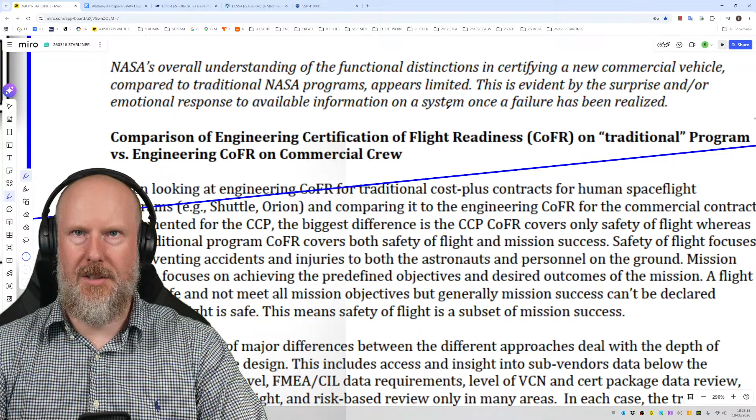NASA's overall understanding of the functional distinctions in certifying a new commercial vehicle compared to traditional NASA programs appears limited. This is evident by the surprise and/or emotional response to available information on a system once a failure has been realized.

This is interesting. I'd like to know more about this. When we say emotional response, who are we talking about? Are we talking about project managers or safety engineers? Who are we talking about there?

Comparison of engineering certification of flight readiness on traditional programs versus engineering COFR on commercial crew. When looking at engineering certification of flight readiness for traditional cost-plus contracts for human spaceflight programs—Shuttle, Orion—and comparing it to the engineering COFR for commercial contracts implemented for the CCP, the biggest difference is the certification only covers safety of flight, whereas the traditional program covers safety of flight and mission success.

Well, there's your problem. There's your problem. So the commercial company is not responsible for mission success—that's what that sounds like to me. They're responsible for safety, but if you've got a mindset of, well, everything's a problem, focus on failures—failures are the problem, and by the way, failures are so low probability we don't have to worry about it—of course this is going to happen.

But interestingly, STPA STAMP can deal with both hazards to safety and hazards to mission success. So you could nail these two birds with one stone using STPA.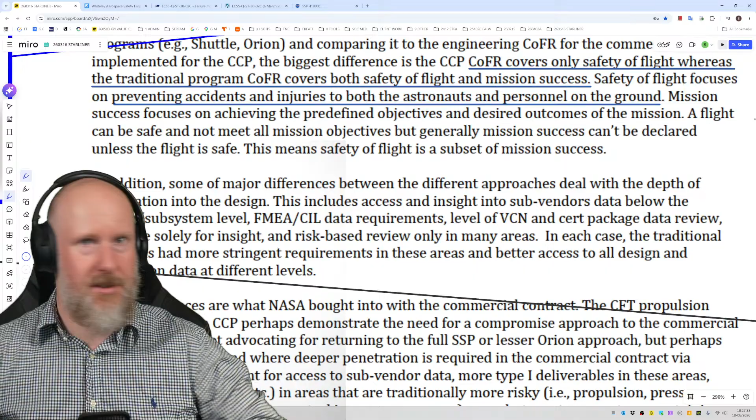Safety of flight focuses on preventing accidents and injuries to both astronauts and personnel on the ground. It should also be about planetary protection as well. So I'm going to get on my high horse about planetary protection, because you don't know what the spacecraft's going to be carrying in the future.

I think that might be a good idea. I'm sure all the planetary protection officers watching this will be like, yeah, Simon, yes. I can't even spell planetary. Planetary protection. Yeah, my handwriting is not very good today. There we go. That'll do.

Mission success focuses on achieving the predefined objectives and desired outcomes of the mission. A flight can be safe and not meet all mission objectives, but generally success can't be declared unless the flight is safe. This means safety of flight is a subset of mission success.

Surely mission success is anyway. In addition, some of the major differences between the different approaches deal with the depth of penetration into the design. This includes access and insight into sub-vendors' data below the subsystem level, failure modes and effects analysis, and CIL data requirements.

CIL, what does CIL mean, Simon? Come on, let's try and figure that out. I can't remember. Is it critical items list? Something like that. The level of VCN. Oh, come on. I know what VCN is. Come on. We had this, vehicle certification, verification closure notice.

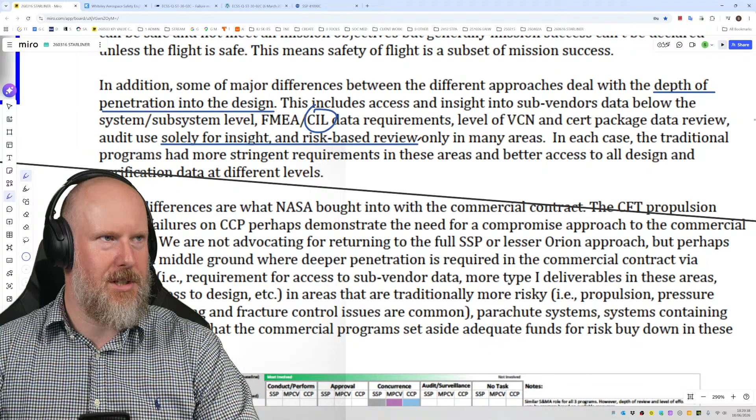There we go. And cert package data audit used solely for insight and risk-based review only in many areas. In each case, the traditional programs had more stringent requirements in these areas and better access to all design and verification data at different levels. So what it's kind of saying, I'm interpreting, is that in traditional programs, NASA would have more detailed insight into the technical design and requirements of whatever it is involved with suppliers and subcontractors and all that stuff.

But they don't have it on this one. So who does that more detailed review? Someone has to do it. If the supplier, Boeing, is not doing that, then of course we can't be surprised when things are missed, requirements are missed. So someone needs to do that, and the supplier should be doing it. But if they're not doing it, then what are we supposed to do about it, it needs to be enforced.

These differences are what NASA bought into with the commercial contract. So I would love to do an STPA review of this commercial contract. I'm sure we can find some huge gaps in it and make it even better.

The crew flight test propulsion system failures on the crew commercial program perhaps demonstrate the need for a compromise approach to the commercial contract. We are not advocating for returning to the full SSP or lesser approach, the Orion approach, but perhaps finding a middle ground where deeper penetration is required in the commercial contract via contract requirements for access to sub-vendor data, more Type 1 deliverables in these areas.

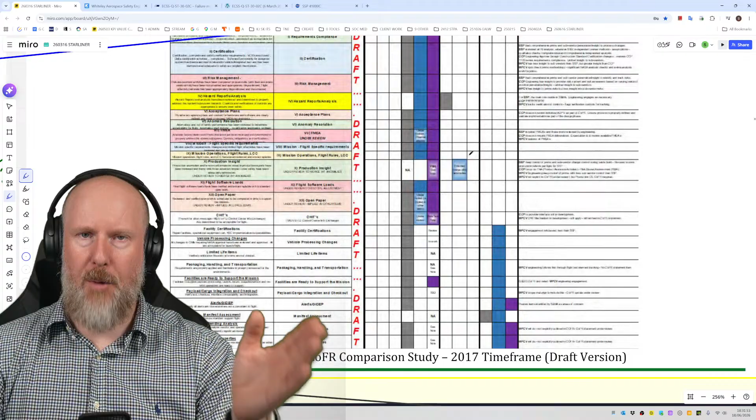Okay, fantastic. Right, let's have a look at this. So this is figure... I agree, but I think there's more fundamental structural issues that need to be addressed than that. And I recommend building a control structure and figuring that out, engineering the control structure to make sure responsibilities and accountabilities are properly allocated and resourced, and that the right people with the right technical expertise get to see the right level of information at the right level of abstraction.

Right, so the engineering COFR comparison study, 2017 timeframe. So somebody's done this work in 2017 and it's a draft version. So whoever that was, well done. Good work. So let's zoom in then.

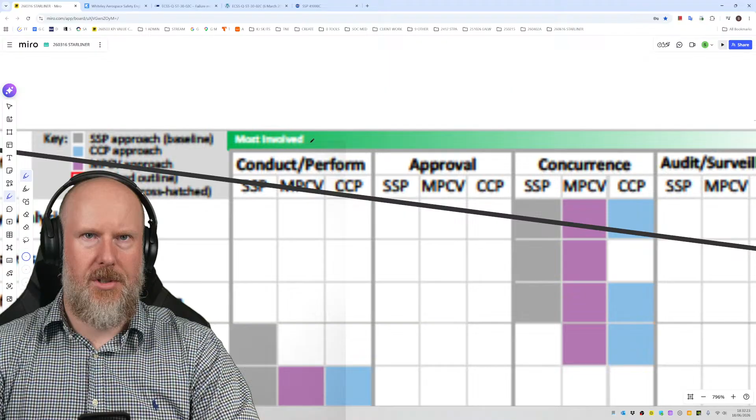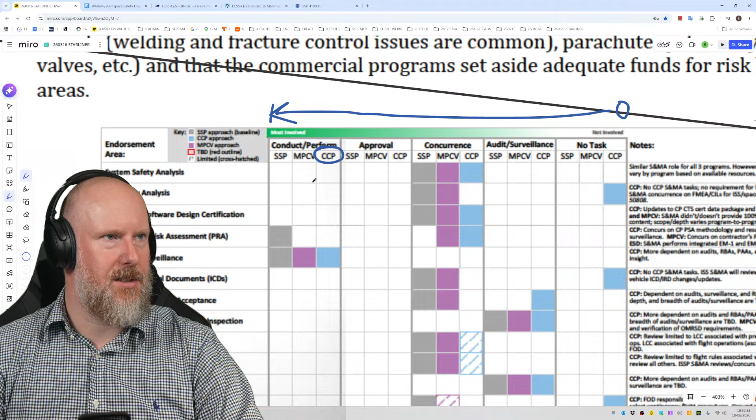So we have endorsement area, most involved, not involved. So 0 to 1 going that way. There we go. Right, so we've got conduct, perform, approve, concurrence, audit, surveillance, no task. This is like a RACI chart. And then there's the SSP, the MPCV, the CCP. So I'm presuming that CCP is the crew commercial program and the other two programs are different vehicles, different programs. So, system safety analysis.

So this is for certification of flight. So is nobody responsible for doing it? That seems a bit weird, I would have thought. Again, approval, review and approval. They should be involved in that, I assume. It's interesting that reliability analysis is on a separate statement. That's a good sign.

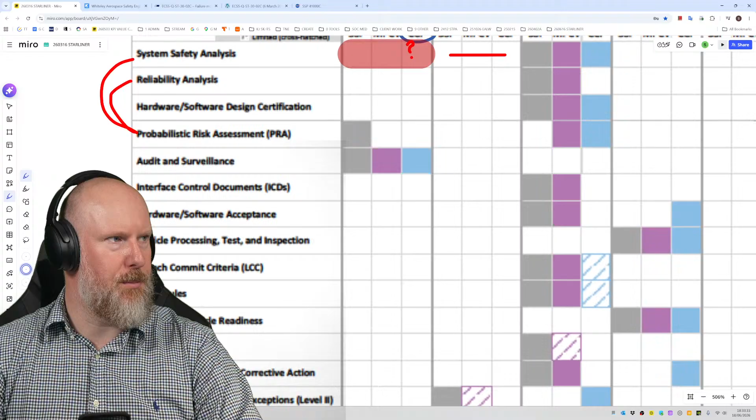Probabilistic risk assessment. Interface control documents, they're important. Hardware, software acceptance, vehicle processing, test and inspection, launch commit criteria - that's very important. Flight rules, integrated vehicle readiness, crew procedures, problem reporting and corrective action, waivers, deviations and exceptions, limited life items, material review boards, alerts, mission support, independent assessment.

And then I can't read all of that, it's too small. Requirements, compliance, certification, risk management, hazard report analyses, acceptance plans, anomaly resolution, FMEA, mission flight... something requirements, mission operations, flight rules, production insight, flight software loads, open paper, CHITs, don't know, facility certification, vehicle processing changes, limited life items, packaging, handling and transportation, payload, cargo integration and checkout, alerts.

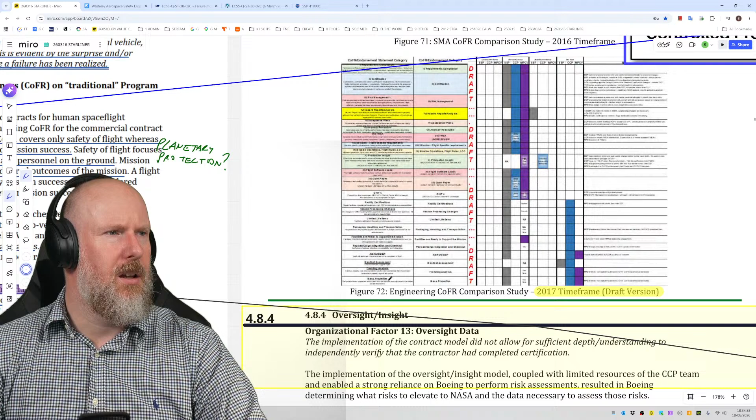Manufacture assessment, Manifest assessment, trending analysis, mass properties. I thought C of G should be in there as well. Anyway. Yeah, I'm not sure I understand this. Similar... yeah, I don't really understand this. Yeah, I don't know. It's too small to read.

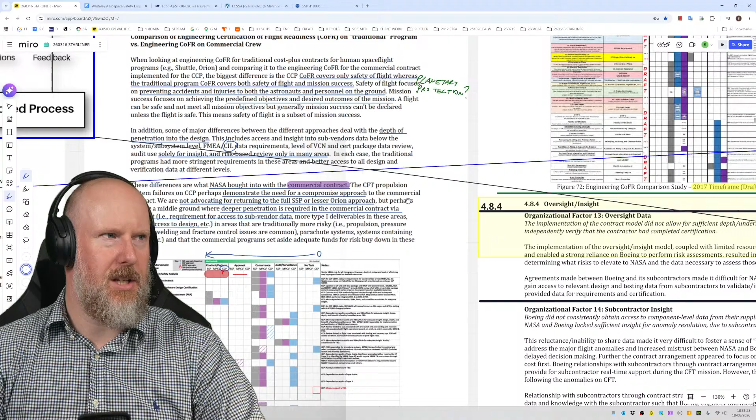I think what it's trying to do, and I think it's a good idea, is try to understand the difference between the traditional approach to certification of flight and the commercial certification approach to flight. Essentially this is a list of activities, tasks and responsibilities that should be allocated around the control structure. Depending on the engineering, the traditional flight certification of flight readiness list of tasks should be exactly the same for the commercial program, but the way those responsibilities are allocated to the control structure is different.

But of course, the control structure between a traditional previous program and this new program is already different. So how do you make sure that those responsibilities, tasks and accountabilities are actually allocated properly? Again, that's something STPA can help with. It will be a bit of work to do that, but it will make your control structure so much better. And of course, the people involved will better know what their roles and responsibilities are and be better able to execute them.

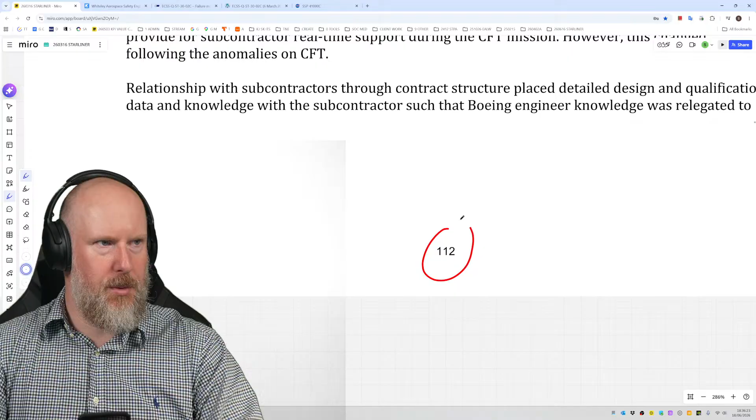Okay, so that's a few pages. We're now on page 112. Fantastic, so we've made some really great progress, should I say?

We've got a couple more pages to go, and then we're into culture and decision making. My throat is a bit rough, a bit sore, so I'm not going to finish these last two pages today. I'm going to savour those for tomorrow, for Friday, and we'll make a good go of it.